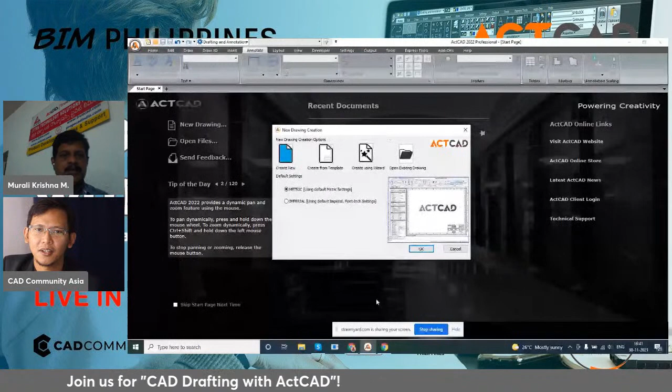So right now I've shared my entire screen, so you're able to see my ActCAD session. I want to briefly explain about CAD software, computer-aided design.

I need not explain much, most of you are familiar with computer-aided design. But back in the 1960s and 70s, most companies used to do drafting manually. From 1980 onwards computers were introduced, and from 1990 onwards computers became available even at the personal level. Most companies and individual designers started using CAD for all their design applications.

Earlier, when I started my career in the automotive industry at Tata Motors, I started with drafting boards, designing drawings on big drafting machines. We used to lock them at desired angles, using engineering drafting devices like French curves, compasses, templates, protractors, dividers, and stencil pens to get the drawing. A lot of manual process was there in the early 90s.

But from the second half of the 90s, since 1995 onwards, a lot of CAD software came into the picture. Our company, our original group OMC Computers, started developing a CAD software in the early 90s called CAD Draft, which was a DXF-based CAD software. We started selling it to many companies in India, especially government establishments, and it was giving some competition to AutoCAD in India at that time.

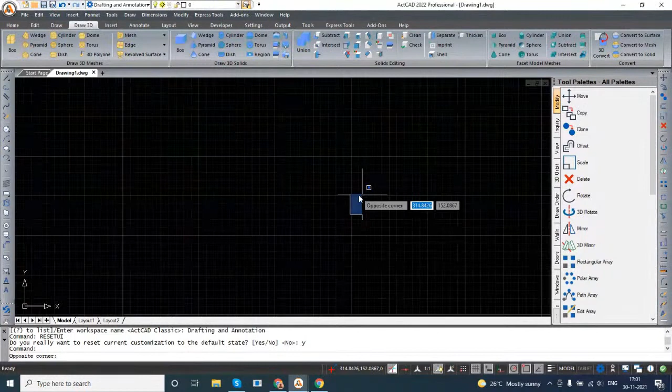Now I wanted to briefly mention these menus. They are logically designed because ActCAD has more than 1500 commands and nearly 3000 system variables in it. So how do you remember all these commands and system variables? There has to be some logical design and logical flow of the application, just like any other software.

All options related to file are available in the file menu - file open, create new, sheet set manager, closing file, saving as, importing from other file formats, exporting from ActCAD to other file formats, printing and plotting related stuff, auditing and e-transmitting, publishing the drawings. All information related to handling files will be available under this file menu.

Next one is editing. Editing is about basic editing operations at the file level, meaning the database, the DWG database level - like cut, copy, paste. It's not related to one particular entity, but as a set or group of entities, you can perform these operations - like pasting from external entities, copying from here and pasting into Office applications, or from Excel, copy and paste special here and then pasting it. All these operations, like any standard Windows application edit menu, you will find those options. Next one is view.

View is related to how your drawing is viewed in this CAD software. So, for example, if you want to regen, redraw all, zoom in, zoom out, zoom extents, dynamic zoom, panning operations, viewports, 3D orbits, like if you want to create and rotate this workspace in 3D environment. So how I'm going to view my graphics window or my entities are these things.

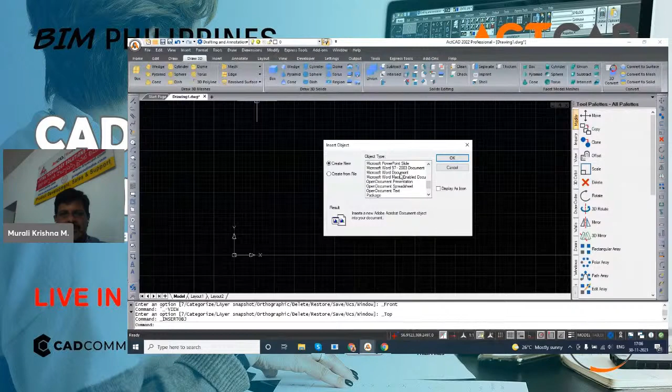inserting maps, geolocation features, setting locations, inserting layouts. This is OLE object. So if you want to insert external objects like Adobe drawings, Excel files, PowerPoint files, open documents, Word pads, all those things, PDF files, if you want to insert into this document, the current document, you can use OLE features. So all those things are available because you are inserting external objects into the drawing. That is the reason we have carefully provided them under the insert menu.

Now, format. Even without looking at the menu, you will be able to understand what is formatting. Formatting means, for example, if you are doing a manual drawing in your engineering college with the drawing sheet and paper, how do you do? First, you take the drawing sheet, fit it onto the board, and first create the borders, then insert the template, creating the title block, and allocating the names, margins, and all that stuff. Basically you are creating your workspace ready, or creating a format so that your design will be easy, and mostly you can do that.

So here, because it is a digital document, you have something called layer manager, layer tools, managing colors, line types, line weights, because these are all related to the format. I can create a line, but whether I need it as a solid line or hidden line, dashed line, center line, I will be able to put this one. Similarly, text styles manager. Most of the styles, why we use styles, that is very important. It is a very detailed subject, but very briefly I will mention because we have time limitation here.

In the drawing, if I'm having 1000 text entities or 2000 dimension entities, how do I want to control the style of all these entities as a kind of global variable or global setting? So I can create any number of text styles in this drawing, and I can quickly modify, and in one go I can select all text entities and apply this format. So I need not go back and select each of 1,000 entities and change their color or font or text height. I need not do everything for each and every entity.

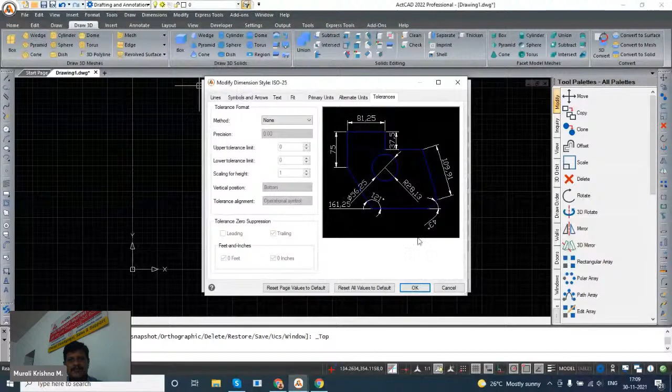And again, the advantage is in the dimension styles, you can set lot of preferences - how you want arrowheads, what types, what kind of text you want, what font you want, or what kind of text style again you want to apply. A particular text style you want to apply to the drawing style, you can do. Similarly, colors, extension lines, primary units, alternate units, everything. It is a very comprehensive dialog box. You can set all the properties of a dimension entity in one go, and you can save it here.

And once you make save here, all the dimensions, as I mentioned before, all 2,000 dimensions in your drawing, all the changes will reflect in those dimensions. Similarly, if you want to change from one dimension style to other dimension style, again it is very simple. You come back and then create one more dimension style, and you change some settings or more settings, or maybe all settings you change, and you can apply.

So that way, all these styles, as I mentioned before, they act like global settings to your drawing, and they reside inside your drawing database. They are part of the drawing database. If you are creating 10 dimension styles, they are part of your drawing file - in this case, drawing1.dwg, whatever is saved here.

So whether you are using this drawing here or you are sending it to someone else - your customer, your friend, your vendor, or your supplier - then all these styles also will be transmitted along with the drawing file. So they are not staying outside the database. All these styles, they are part of the database.

So that's the reason anyone can open this style again in either ActCAD or maybe any other software, let's say AutoCAD. They can edit the styles there, or again they can modify, and if they make any changes, again we identify them here because the database is same. Basically, we are also reading from the same DWG database. They are also reading from the same DWG database.

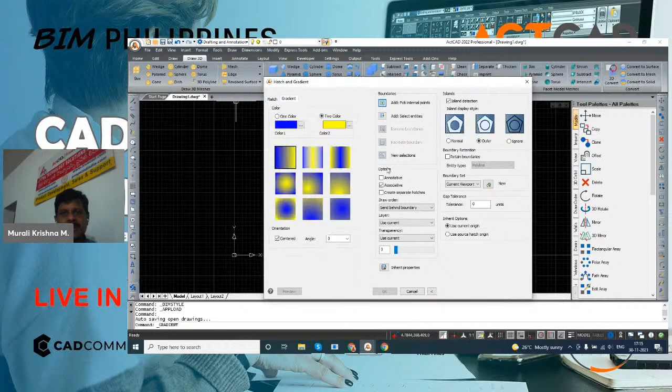You can explode dimensions, and even if you transmit them to other tools like PDF, these will be automatically exploded because there is no such entity called hatch in mathematics. But in engineering drawing, there is a meaning to this hatch, color gradient or color transitions. So we have created the entities and we do these color fills as required for the drawing representation and showing the presentation drawings. That is what is available under this draw menu, including 2D modeling and 3D.

And now if I'm changing it to the 3D modeling workspace, like that you can create a lot of workspaces. So here now I'm having the solids editing options, meshes, 3D converting options, and the file import and export options. Like that we have many more options.

But now again I'm coming back to the drafting and annotation workspace, which you can change from here, or you can also change from here by right clicking. You can go to this 3D modeling or classic workspace.

Now dimensions, as dimensions are very vital in engineering drawing, we have created a separate menu with various types of dimensions like linear, aligned, angular, ordinate dimensions, radius, center marks, tolerances, geometric dimensioning and tolerancing, and also managing these dimensions.

Like one more link, though basically it is the same link as I have shown under the format menu, but again this is available under the styles manager, saving styles, restoring. So everything related to your dimensions or any kind of dimensions, baseline dimensions, continuous dimensions, ordinate dimensions, or tolerated dimensions, size tolerances, geometric tolerances, everything is available under this menu.

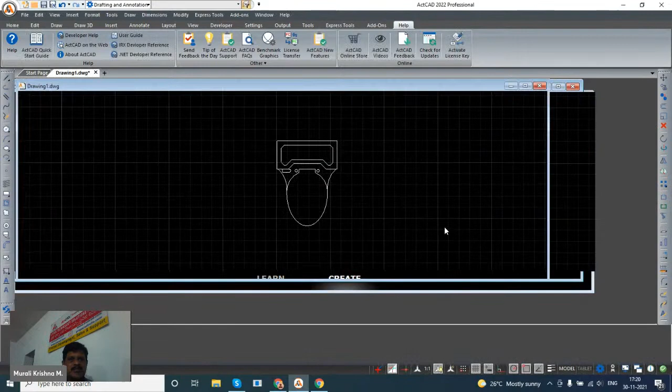So now if I want to make my start page active, I can do this. And again in the window, I am disabling the cascading options. So now you can switch these options using these window tools.

Finally, the help menu. As you all understand, any software will have complete help, developer help, user guide, tip of the days, our websites, and checking for any new version available on our server. If you want to send any feedback to us, benchmarking graphics, and about ActCAD, which version you are using at present. So 10.1 is the latest release of IntelliCAD, and 750 is the most latest version available.

Every month, we will be doing a lot of releases and patches, and you need not reinstall or uninstall the software. You simply go to the help menu and click on check for updates, and it will find if there is a new version available on our server, and automatically download and apply the patch to the installed version without the need of licensing.

So the menus and ribbon tabs are also carefully designed, like draw, 3D, inserting, annotate. The names are slightly different, like layout tab is available here, view is available, developer for developers and programmers who want to record scripts, writing programs like LISP, C++, VB.NET.

If you want to write more programs, you can use all the options here, you can find them. And settings, as I mentioned, like options - for example, if you want to control drawing options, drawing limits, drawing settings, workspace settings. If I click this, what is my default save format? If I always want to save my drawing in 2007, or save my drawing every 2 minutes, 3 minutes, what are the default file paths for support paths, templates, hatches, line types, blocks, hatch patterns.

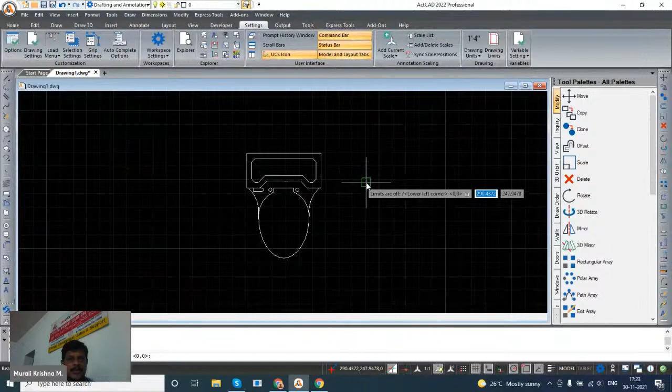Whatever things you do at the edit level are applicable to the particular document. But whatever modifications you do here are applicable to a particular entity. So you need to understand these differences, like drawing settings - if you want to set the drawing limits or settings, here also you can specify. There are keyboard shortcuts also available.

DS is the shortcut. Right now, you are able to see the drawing settings, like drawing units, angular settings, linear settings, UCS settings, coordinate inputs how you want, snap and grid, whether you want to enable them, and entity snaps, what entity snaps we have identified. Now, entity selections, whether I want to increase or reduce this pick box size, or increase the selection aperture, or entity snap representations, and the drawing limits, tracking. So all the settings related to your drawing, you can make them here. These settings are applicable to a particular drawing or the active document which you are using.

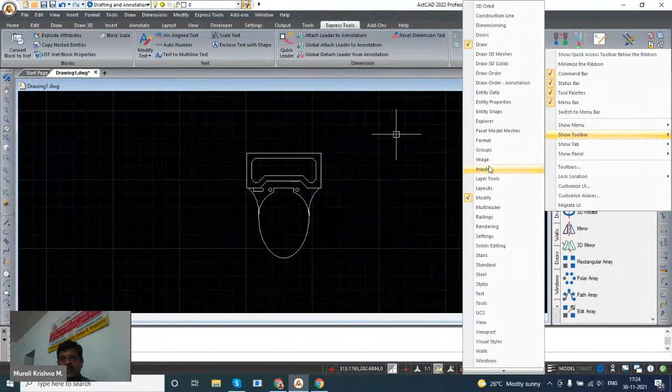This is the brief overview, and this is called the graphics menu, and these are called toolbars. Toolbars you can always move either horizontally or you can keep them here. And if you want to show more, you can always right click here, and select which menus you want to show, which menus you want to disable. And toolbars, there are so many toolbars available. Which one you want to use? If you are always working with images, you can enable that image toolbar and keep them here, and if you don't need it, you can close it.

So there are so many toolbars available, and this is called tool palettes. The most widely used things and most important commands are all available here. Similarly, if you click inquiry, tools are available here. If you click view, like front view, top view, side view, instead of going to the menus, you can click directly here so that you can access those commands. And the 3D options, draw orders, changing, inserting walls, doors, windows. You can also insert more and more tool palettes to your stuff. You can create your own tool palettes. If you are having your popular settings, you can also add them to this one.

These are some of the standard symbols. You can directly double click and insert into the drawing. And you can customize these tool palettes also based on the expert level or the advanced options you need. You can customize this tool palette, you can add, you can remove, you can move, and again, this is toolbar.

And as you see, this is the command prompt. Whatever may be the inputs you want to give or inquiries you want to give, this is the command prompt. And if you want to see a bigger version, simply press F2, and all those things are available here, all the keyboard shortcuts, function keys.

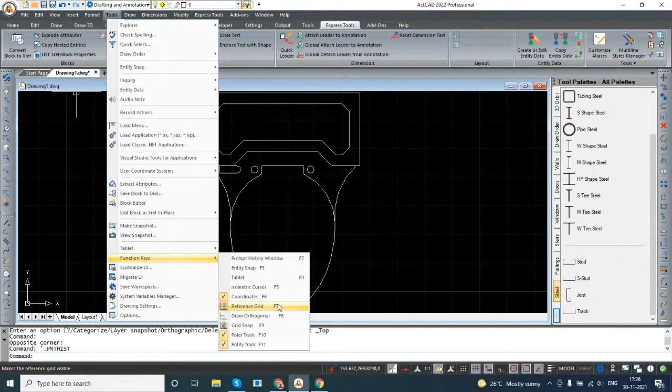Now you see here, this is F2. F3 for enabling or disabling entity snaps. Tablet options, F4. And isometric cursor, if you want to draw it in isometric mode, simply enable F5, and then your cursor will behave like an isometric constructor. And if you want to display the coordinates, like the coordinates are being displayed here. And if you want to enable the grid, the graphics grid, whatever you are seeing on the back end, F7 is the shortcut. And orthogonal entity snaps.

If you want, we will provide the settings under the customize menu, like under tools, you are having these options. Similarly, customize user interface, customize UI. Here, again, we have all these workspaces, whatever we have defined. You can define your own workspaces either through this interactive customization dialog, or you can go back to the CUI file, which is available in the install directory, and you can make a lot of changes: creating new toolbars, removing some toolbars, inserting some new ribbon tabs, all those things.

Similarly, aliases, and these are the keyboard shortcuts, whatever I have explained, like F1, F10, F2. And if you want to make any change, you can always click and change it here. Or for F5, if you want to use something else, you can change it. But mostly here, we keep them very much similar to other CAD software, because most of the people, for example, F8 means ortho mode.

Ortho mode - users are already habituated to other software, so we don't want to give a different shortcut for that. That's the reason we're maintaining the same effect here. So like this, you can import settings from other software, and you can export the CUI files interactively.

The keyboard shortcuts are all available here too. For example, beside everything you have Control+Plus, Control+1, Control+S. You can customize everything in your CUI file, either interactively or based on your expertise level, by going directly to the CUI file and making necessary changes.

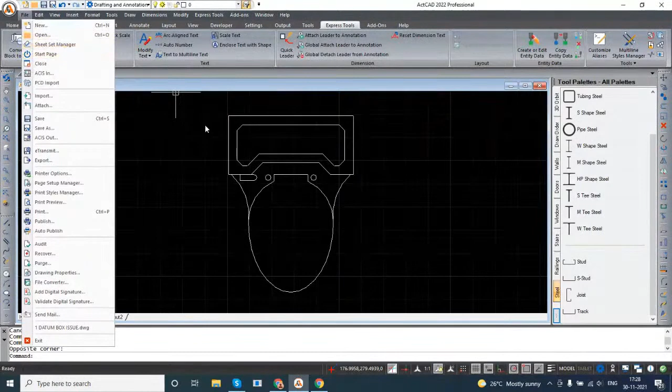Now, this is the bottom panel. It always shows the indicator and message. For example, going back to the home menu, if I click line, now I'm creating a line, and you can dynamically see the coordinates. We also support dynamic screen input, like how we are creating here, and all the options are available. Now it shows the current status.

For example, if I want to insert a block - this block I already have in the database - I'm able to repeat it once I get into the same drawing. So now you can see the cursor movement and coordinates here.

This is cursor mode, whether you want to enable or disable it, and the crosshair mode, how you want to show them, and annotative scales. Once you want to plot your drawing or entities at a different scale with respect to your paper or plotter size, you can use the annotative scales, and all the supported annotative scales are available here.

Similarly, how they want to be visible, all the settings are here. And here's snapping mode - how you want to snap to these entities, enable or disable running snaps. If you enable running snaps, whenever you keep clicking on things, it will automatically try to snap to the control points.

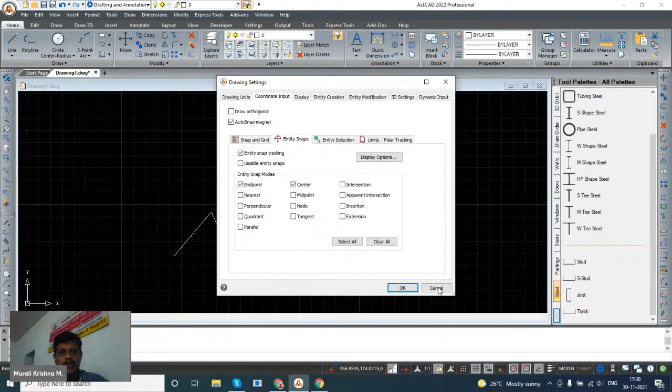If you click on settings, you'll get the snap and grid settings here. And entity snaps, as mentioned before, like endpoint, start point - whatever is to be default enabled - you can select them all, clear them all, or show only the major ones. You can apply or cancel these settings.

Another thing is the dynamic screen mode input. If you want to switch it in or out - what is dynamic screen mode? For example, if I'm typing, now 112 is there, I can directly type the value here, and that line has already taken this value. Now if I want to type 80, the line length automatically becomes 80. So I can dynamically input values on the screen graphics window itself, instead of going to the command prompt - that is dynamic input.

Whether you want to enable or disable it, you can do that here. And ortho mode, again F8 - what is F8? If you want to enable it while drawing a line, you can also use the Shift button. If you want to send it either perfectly horizontal or perfectly vertical, ortho mode has to be on. For example, if I switch this off, it can go in any direction.

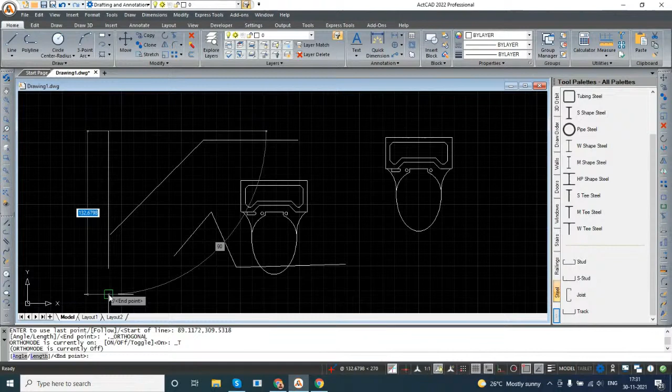Okay, now you can see it's going at any angle - it's not assuming the nearest snap or magnet that it should go perfectly horizontal or perfectly vertical. So if you enable this ortho mode, like we do in orthographic projections, that will help take perpendicular lines from the current cursor location.

The next one is polar tracking. If you want to enable polar tracking, with respect to the point, if I'm taking the line, at what angle I want to give, you can snap that value - the angle, whatever you're giving, whether you want it at an increment of 5 degrees, 10 degrees, or 6 degrees, you can do that.

And as mentioned earlier, these are all the entity snaps. You can go to drawing settings, or go to the tools menu, or directly do it from right-click. We've given the popular shortcuts here - either you can enable or disable them. Similarly, if you come and...

In the draw menu, all these settings are also provided. This is the example of running snaps. If you are having problems picking some entities, you can enable these running snaps, and the software will behave a bit more intelligent and try to capture snap points from other locations. The same settings are available from multiple locations, including this bottom menu which we can access from here.

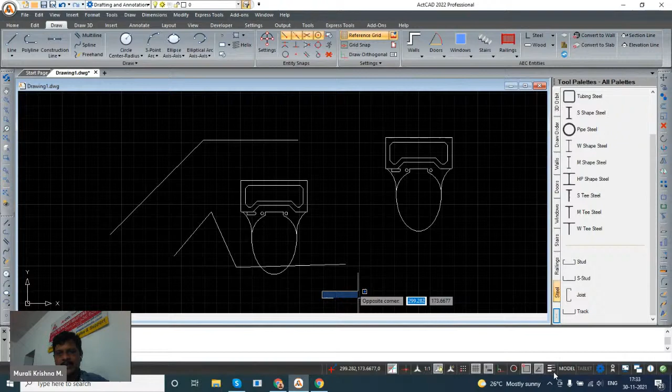This is about line weight display, switch off entity track, and line weights, whether you want to display line weight or enable or disable it. So if the line weight is 2mm, then if you enable this, it is displayed as 2mm. Depending upon your requirement, you can either enable or disable it.

As I mentioned, this is switching between the workspaces, and this is about our graphic device. In ActCAD, we support 3 modes: basic mode, OpenGL mode, and OpenGL ES mode. Right now the advanced OpenGL ES is disabled because there are still some compatibility and stability issues with the OpenGL ES graphics drivers, but the default setting is OpenGL. To operate ActCAD software, you don't need dedicated graphics hardware - whatever drivers you have, whether onboard or dedicated, every computer will have an OpenGL version, and we need at least version 2.0. If you have a higher version, it's better - you can get better graphics performance from the software.

You can set this value, GS used device mode, and that is a system variable. Before moving to the next topic, I wanted to show you the most important thing here. As I mentioned, there are a lot of system variables. What is a system variable? Most users may not be aware. There are many variables available inside the drawing database, for example FILEDIA, which controls how something should be displayed. Now we have all these system variables available, along with their limits.

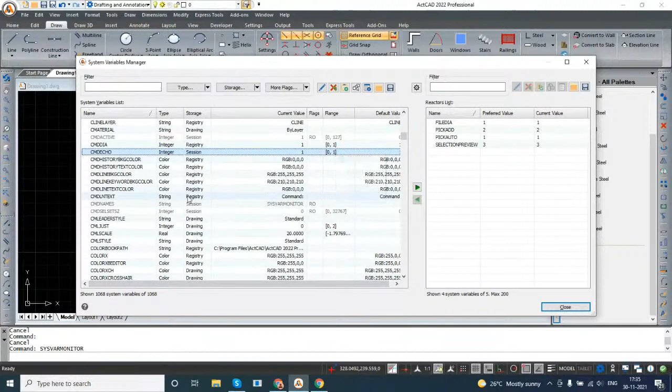For example, CMDECHO - if you check it, it shows a range of 0 and 1, whether it should display or not display in the drawing prompt. Similarly, if I want to change the pick box, which I showed you earlier from the dialog, now you can see the pick box entity is available here, and what is the current value? I set it to 7. But what is the permitted range? 0 to 50. And what is the default value? 6. So if I want, I can even modify them here - this is the value I can change. But if I try to give 99, I will get a warning, so it cannot go beyond the permitted values.

What are these variables? They are nothing but the settings or preferences or values available inside the drawing. For example, pick first behavior - either you want to set it to 0 or 1. A lot of advanced CAD users are familiar with these system variables.

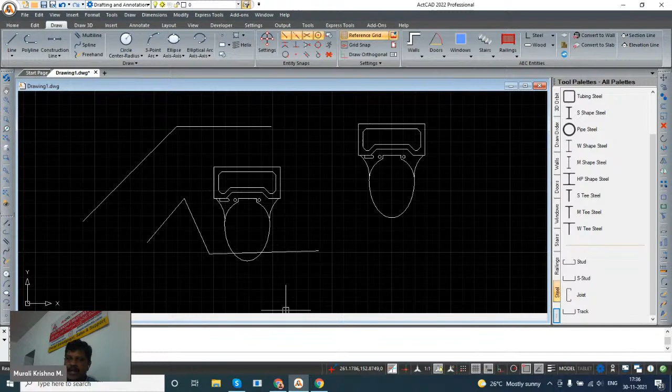What I wanted to show is we do have a sysvar monitor if you want to quickly find some settings inside ActCAD - for example, if somebody wants to increase the text quality. So once again, in the sysvar monitor, I'll type 'text'. Now all the system variables related to this are coming up - what is Q text mode, print text out, M text ED. These variables are very similar to AutoCAD.

Now here, TXT - text quality. At what quality do I want to set the value? 0 and 100, so the least value is 0 and maximum value is 100. Similarly, text size - this is how you define these values and settings. All system variables are part of your drawing, saved inside your drawing file. If you change this value and save the drawing, this value becomes part of the drawing.

If you open it in some other ActCAD version or competitor software, the same value will be reflected there. Similarly, text style - what is the default style? Either you always want to keep standard or something else, since right now this default drawing only has one text style. You can have many operations related to everything like this - either select all, select clear all, related to text, points, and everything. These tools are not even available in some expensive CAD software.

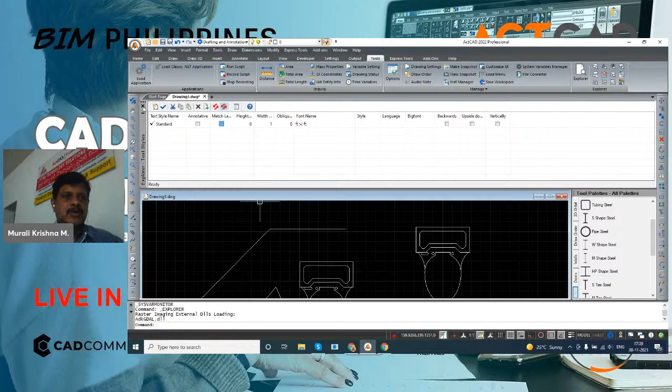Let me map them here. Like this, it will open up all the things under the palette, and here you can find how you are going to display them. So like this, now text styles opened here. Now you go back. You can also separate them like this.

I have taken that out. Now again, you can dock, auto hide, make transparent, or close it. Come back to the Explorer, it is available. What are the external references available in this drawing? Right now it shows 0 items are used. What are the current blocks? Double click, this is the WC plans. How you are going to orient this, you have to set whether you want this Explorer horizontal or vertical.

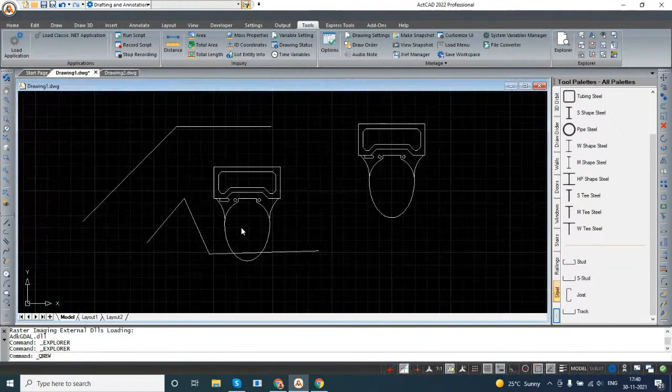But copying a block from one drawing to another drawing is also possible. For example, I have created one more drawing here. Now coming from the Explorer, double clicking the block, selecting it, copying, and coming here under this block, I can paste it. Now this block from this drawing I have easily copied and pasted into this one. Now it is part of this drawing's database. Let me go back and insert. Now you see, it is part of your second database also.

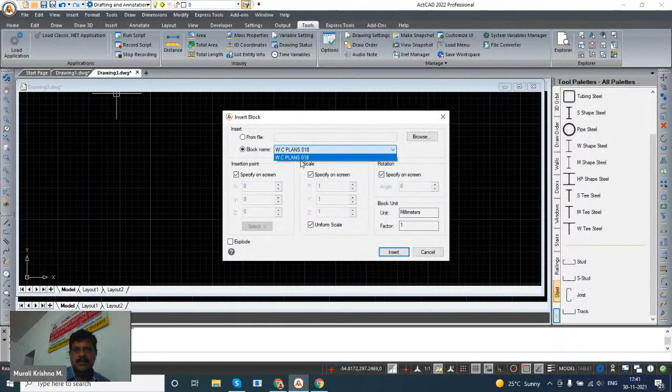Whatever is here in the other drawing also, I am going to the Explorer once again, paste it, close here, and again in this drawing if you go to insert block, that is already available because I already pasted it into the database. So even if you have 20, 30, 40, any number of blocks from one drawing to another, you can easily copy and paste. You are pasting them as blocks, but it's not only related to blocks. Dimension styles, layouts, materials, groups - you can copy and paste any of these. So this ActCAD Explorer is also another powerful tool.

Now let's also talk quickly about model space and layout space. I am closing this drawing. Model space means this is the 3D modeling space, and layout is basically a kind of paper space, so you cannot rotate these views - it's only a 2D representation. Whatever you see here are called viewports, like the view boundaries which you can adjust, and this is the position of the view.

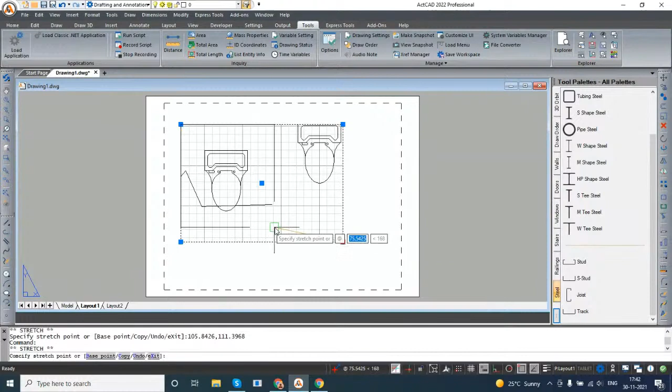It has nothing to do with the entity you are drawing. Even if you delete it here, you are only deleting the representation. But if you go back to the model space, that entity is still there. So what is the advantage of model space and layout space? Now I am having this entity here, and here I can insert viewports.

You can also go to the layout, and here we have viewports. If I want to insert 4 viewports, you select from here to here - one layout or multiple viewports, all possible here. If I want to insert 2 viewports, it asks horizontal or vertical, vertical, then first point and second point of the screen. Now it has inserted 2 - see here, this is one boundary, this is the other boundary. You can use them for 3D models - for example, if you have a 3D model, you can insert front view, side view, top view directly from the 3D model based on availability.

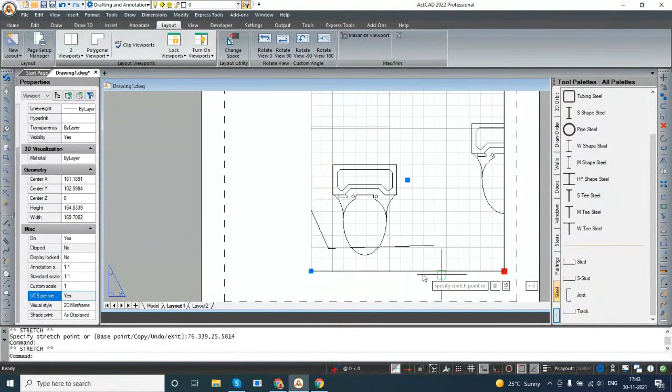Now in this case, I right click and set the properties. This is available at a particular scale - this is the custom scale, let me put it as 1. So now in this drawing I'm showing this western commode at 1:1 scale. But in the other drawing, I wanted to show it at double scale or half scale. Again, you go here and change the scale, maybe 2 here. So this is double the scale, and you can adjust the boundary and position as needed.

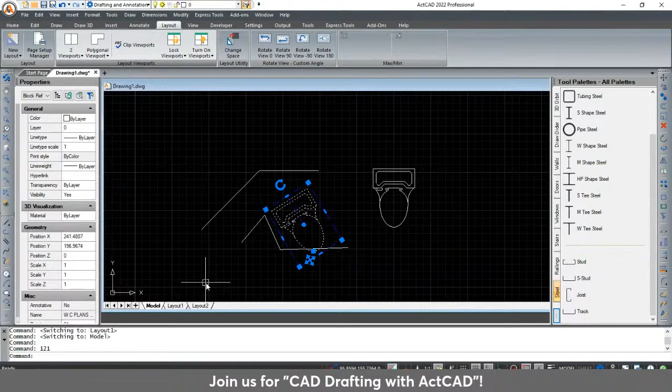Now the same entity, in this view I am showing as 2:1 scale; in this layout I am showing it 1:1 scale, or like a detail view. Whatever modification I make to this one, the changes will reflect in both views. For example, if I rotate this here in model space, it has associativity to this one, so now this is rotated here too.

So that's mostly for plotting purposes and creating 2D views, orthographic views, and giving dimensions irrespective of the original geometry scale. For example, if you are designing a very big vehicle, the actual size is too big, but you cannot plot that original size to the drawing. That's why you can insert a view at an increased or reduced scale. So that is the concept of viewports, layouts, and model space.

Now I have one more topic I wanted to convey, the concept of layers. For example, if you go to the home tab, here Explore Layers. So what is the concept of layers? In order to manage all these entities in your drawing, you can define an infinite number of layers.

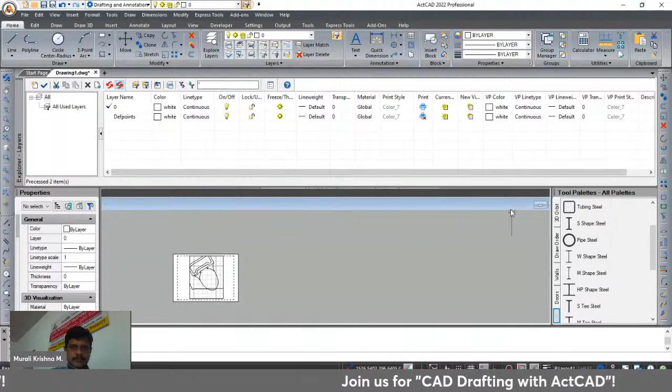For example, coming to this particular drawing once again, now I'm able to see the model space. This I wanted to move to a different layer, say layer number 2. I don't want to see this one, so I can set this layer, move it to the layer, or in the properties palette, directly set it to layer number 2. Okay, now those entities are on layer number 2.

For layer number 2, I can also apply different kinds of styles. Let's say I change the color, change the line width, apply locking, or change the line type to dashed lines for all entities on that particular layer. And if I don't want to show them, I can simply switch that layer on or off.

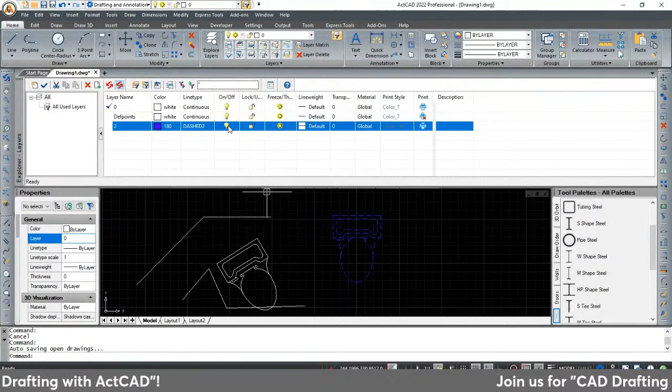It's like plastic sheets. You can create the plastic sheets one behind the other, one above the other, and create different entities on different plastic sheets. If you remember the old overhead projector, if you keep one sheet, only the contents drawn on that plastic sheet are projected to the screen. If you overlap one more plastic sheet with different entities, then both can be seen projected after projection. So like that, you can insert multiple layers.

So those are the physical plastic layers which are transparent, but here these are the digital layers available inside the CAD software, and you can create an infinite number of layers.

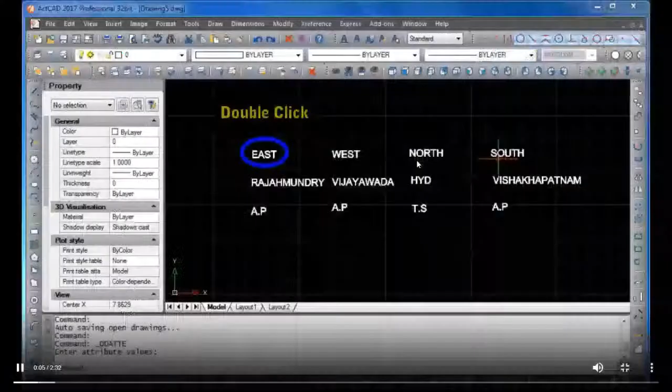For example, if you type a command called tutorials, because I cannot demonstrate everything in this session, it will launch our videos. File menu, view menu, edit menu, draw menu, all the commands are available. If you want to play those videos, you simply play them here, and most of the time we have audio showing how the operation is performed, live demonstrated. Though it's a 2017 version of ActCAD, most of these operations are still valid. Similarly, for 3D modeling options, 3D tools menu options, how to create these things, how to create and manage layers, we have detailed videos available for your practice.

So there are so many advantages of layers. Like for plotting, you can set a particular style, and if you want to exclude this layer from plotting, you can cross it out. So whenever you are plotting, for example, going back from print preview, you want this only for your representation. Now going to the print and plot dialog, I'm selecting ActCAD PDF printer, and in the window I've selected these entities. In the preview, if you see, that is not available because I have locked it on the layers - I have not permitted it for plotting or printing.

So like that, again, you can go back and unlock it, you can change the line colors, and at a global level, for all the entities in that particular layer, these changes are applicable. So there are so many advantages of layers, which we have explained in our quick start guide and also in the detailed help menu.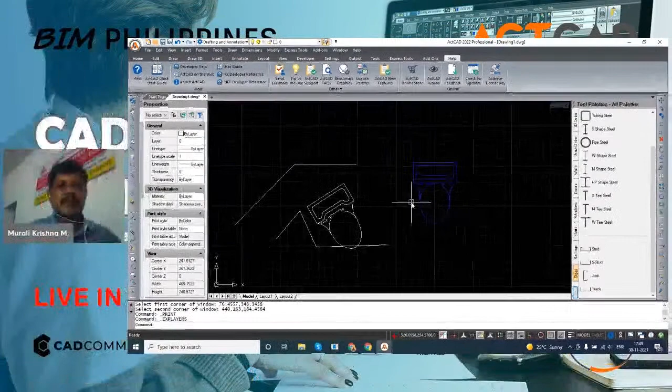So that is the concept of layers, and you can create any number of layers without any limitations. You can name them any name you want, like doors, windows, and our 3D entities like AEC objects for the BIM elements. If you are inserting a wall, automatically wall layer will be created. If you are inserting a table, the table will go to the default layer.

And always there has to be some work layer, which is having this check mark. That is the default layer. Whatever entity you are creating or drawing, that will go and stay in this layer by default. If you want, you can always change it by right clicking, and this is called the properties palette, which you can always use.

Now, some of these operations, if you want to manage these things, with the mouse wheel, if I'm rotating, zoom in and zoom out operations. Similarly, if you right click, you have so many options like real-time panning, real-time zoom, like if you want to do it in a 3D sphere, if you want to rotate them and see, these are all planar entities, 2D planar entities.

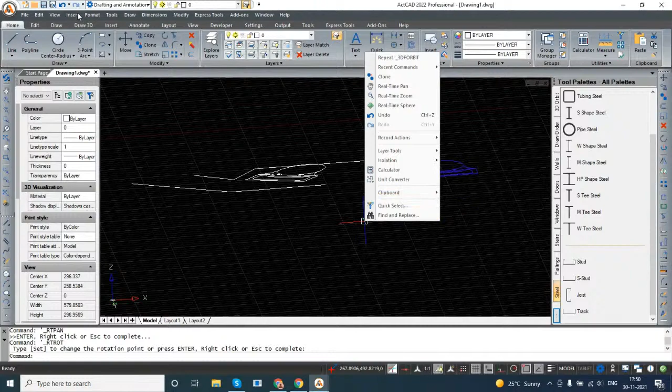But if I want to rotate them, right now I'm not doing any 3D modeling in this, but you can directly see all of them here. And if I want to cancel and go back to my other view, view menu, 3D views, and then top view.

So here also under the view, you have most of these zoom operations: dynamic zoom, previous, zoom to previous, zoom left, and most of the times we use zoom extents, Z enter and E enter. So now again, when I'm typing the zoom command, it is showing multiple options here, like zoom in or zoom out or zoom all or zoom center or dynamic.

And the extension, when I used E, then it has taken extents. Sorry, because that is starting with E. That is the kind of syntax and the level you can always follow throughout this one.

And we also support clickable keywords. For example, when I'm typing zoom, instead of clicking that, you can also do the right click. Okay, now it is asking what is the upper right corner, and do this. So whatever value from here to here, whatever is the distance, with that much scale factor, it has scaled, zoomed my entities. Basically, it is not changing the size of the entities.

The zoom and pan operations are basically enabling you to see things better, because your graphics window space is limited, because you have a very small screen and you cannot see the very big drawing here. And if you want to do some operation, you can zoom in here, and REA is a command like regen all. When you do it, now it is zoomed properly and you can perform your operations here.

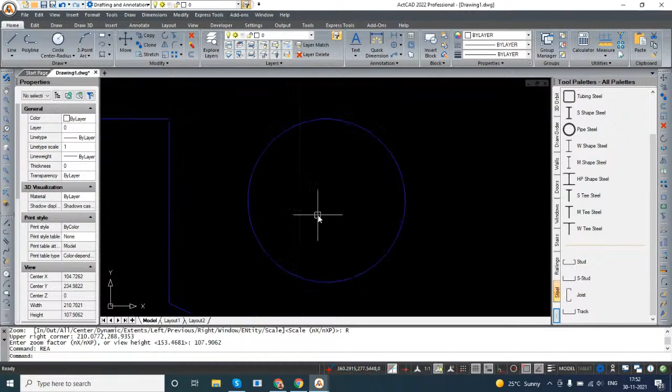Like if I want to do a hatch inside this one, you can select and then you can click the point, enter, and do it. But right now that hatch is not visible because the entity scale is very small, right? So that is the reason the hatch entity, I need to select, and then I need to increase the scale or decrease the scale.

Maybe I can show it on a separate entity, like this circle. I am applying hatch. Okay, now you see, because this circle is much bigger, for that particular scale it is visible, but because this diameter is very small, that is not visible.

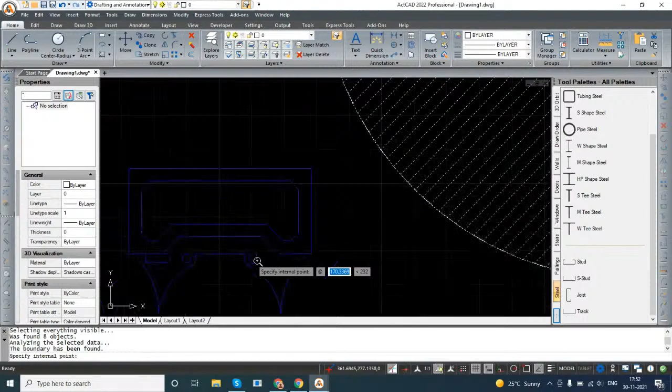So like that, you can select these entities, and you can do that. And if you want to select such entities, you can also use this quick filter, and filter options are always available, like layer 0, layer 2. Now I'm getting the hatch. From the tool palette, when I'm enabling that, I want to reduce it now, because that was no more visible to me on the screen for selection. But when I selected like this, I'm able to see that.

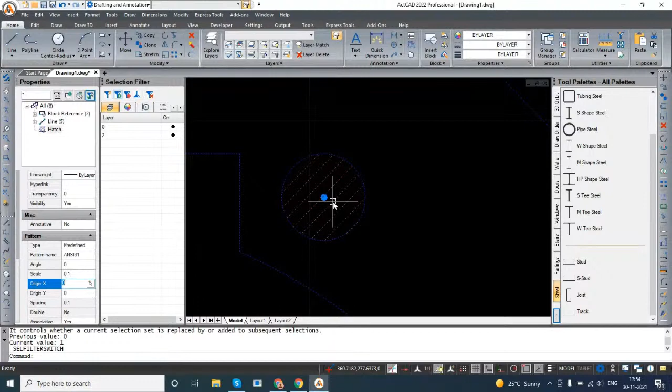Okay, now I'm going to the filter option. Layer 0, this entity is available, and this maybe I will still reduce. Okay, this scale I have to change to 0.1. You see, you are able to see that. So though I am unable to see the entity, the entity still got created earlier. So now if you want to delete it, you can select it and delete it from your drawing.

So these are all the advantages of creating the zoom in, pan operations, dynamic pan, dynamic rotation, like that. And as I mentioned before, the entity snaps, if I want to select the endpoint of this, now let us do one small activity here.

Okay, this is the polar tracking. Now entity snaps, I have cleared everything. Now if I want to draw one line exactly to this one, now you see it is not allowing me to do that. So that is called entity snaps.

Now I'm going back to this one. In the settings, now I am enabling, let's say, endpoint. Okay, now you see I'm able to pick the endpoints, but not the midpoint here. Okay, so here also I'm unable to meet. Either I can click this endpoint or this endpoint or this endpoint or this endpoint. So based on your requirement, you can go to these snap settings, and you can enable nearest, perpendicular, parallel, or quadrant. Now you see, it is able to identify the midpoint also.

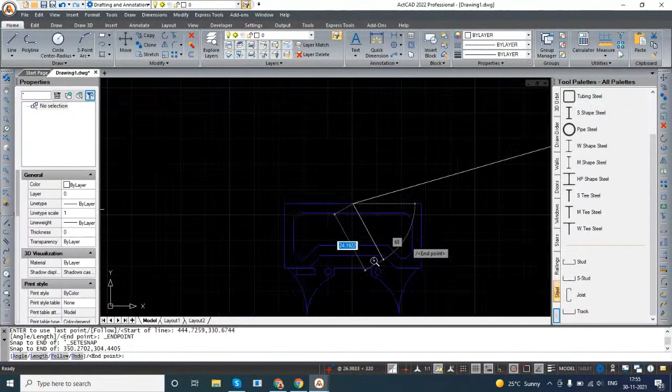So like that, you can create the snaps. The entity snaps are very useful. And object tracking, the entity tracking, e-tracking, that option is also very useful.

And as I mentioned, orthographic is for perpendicular control. Now, if I want to draw something, this is snap to grid. So now I will be able to snap to the grid points also. You see here on the grid, if you want to draw something, and that grid size you can always adjust. Now you see I'm able to enable the snaps, like the magnetic pick points onto the snap. So that is the option here.

Orthogonal on and off, and entity snaps. Okay, again I'm selecting, click OK, like this. Now you see, the ortho mode also I have enabled. Now when I'm drawing here, those magnetic lines are showing me, this is called the entity tracking or object tracking. So now I know that I am drawing a perfect horizontal line. Now I am drawing a perfect perpendicular vertical line.

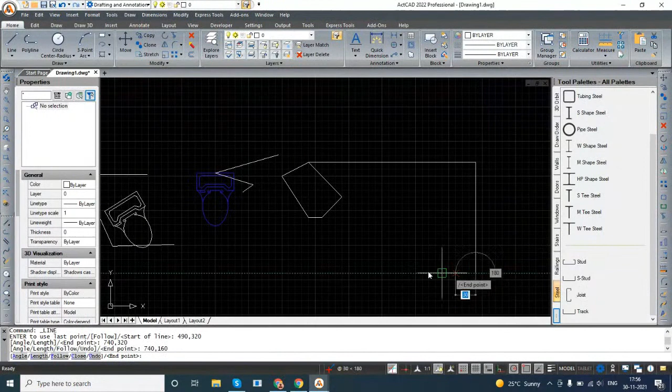Now you can also snap to this endpoint. Now along that line I am creating, this endpoint is lying on that straight line. So like that, these are called e-tracking, entity tracking, or object tracking. E-track means entity track, O-track means object track. Some softwares call it O-track, we call it E-track, or vice versa, something like that.

But basically, if you want to track the entities, now I want to create a line which is inline to this one. So that is how I have enabled that snap. Now let me disable this because both are getting conflicted. Now when I disabled it, you see I'm able to get the perfect snap of that one.

Okay, now again, if I want to draw, you are able to see those green lines. These are the rubber bands. So even I am able to find the virtual intersection. So now that line is a perpendicular exact intersection of this line. Now I can complete that line. So that is called object tracking.

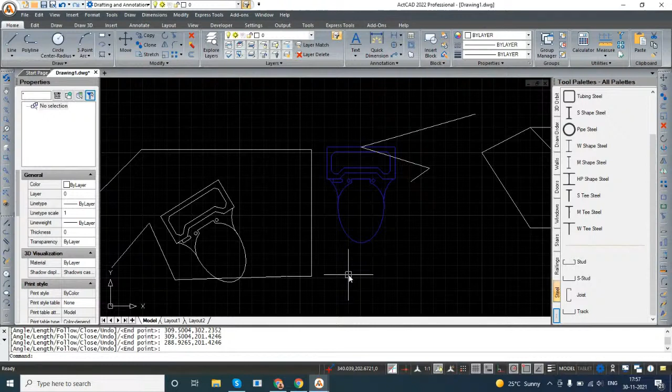So we will move to the next topic. I have shown most of these basic settings, the interface, the controls, the snap settings, e-tracking, O-tracking, and the snap settings, layer settings, what are layers, we have seen everything.

Now quickly we will see the line. This is the standard line segment. You can create lines here, and to create lines also multiple options are there. You can go by relative coordinate system or absolute coordinate system.

And the circle, as you can see, there are so many ways of constructing circles. Tan circle, using 3 points, using 2 points. They are very self-explanatory, how you want to create a circle.

Similarly, arc, so many options are available. Whether you want to create a tangent arc, a 3-point arc, arc with start point, angle and center, or arc, center, start, angle. Why these many options? Basically, mathematically, there are so many possibilities to construct an arc based on the user requirement and user input. You can do that.

So arc, line, and circle. But why did I skip polyline? Polyline is a combination between these two things. Now you see, again, it is showing the options. Now if you want to draw an arc, I simply clicked on arc. I have, now the arc is being continued, right? And again, if you want, whether you want angle or center or direction, or you want to convert again to the straight line, you can do that.

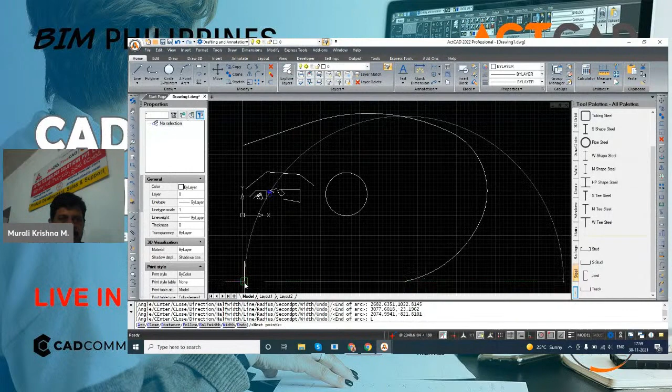Again, entity track is created. Now what is the difference between this and this? These are three separate lines, three separate entities, and on the history also it is showing three. But when I'm selecting this, it is one entity. Though it is a combination of line, arc, and another line, it behaves like a single entity. That is called polyline.

And you can always explode it. Now when I exploded it, you see it became separate entities. In the history navigator also, you can see I'm having 2 lines and 1 arc.

Polyline - so even if you take rectangle, rectangle is nothing but a polyline, and polygon is also nothing but a polyline. Rectangle is nothing but a single polyline. Now when you explode it, it became 4 line segments. But for the sake of convenience and for drafting purposes, you can always use this one.

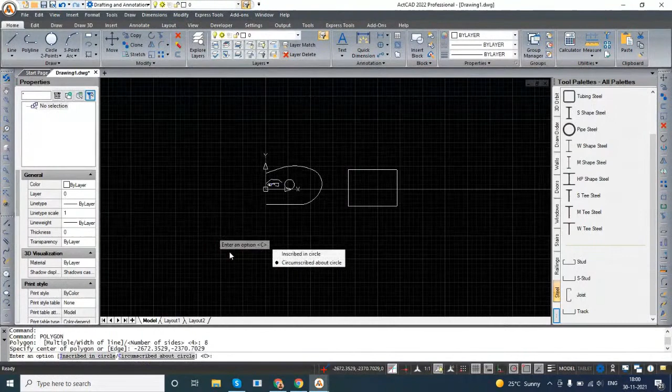Similarly, polygon is also nothing but an entity which is a polyline. Now you see whether you want multiple or single, number of sides - how many you want? I want 8 sides, that will become an octagon, and specify the center of this polygon. So inscribed circle or circumscribed circle - you can decide, and you can create and put the point.

Once again, I'm telling what is the computation, what is the rationale behind these constructions. I'm using the included angle of any polygon, which is equivalent to 360 by n, and it is a combination of all equilateral triangles - that is what polygon is. If you have 8 sides, that's 8 equilateral triangles, and the included angle of each triangle is 180 degrees, and the angle between two sides is 180 minus 360 by n. That is the standard formula.

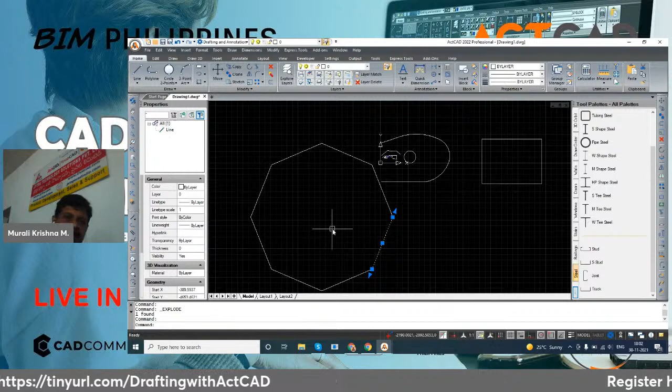Whether we write the program or somebody else writes the program, they have to abide by the same logics. Once you explode, even if you write your own program using Lisp or .NET, you have to go by the same mathematical fundamentals. We cannot change the geometry and the basic rules of mathematics. That is what I'm trying to show again and again. Whatever you are creating, how you write your code - whether it is efficient, or if somebody else can write a program much easier, faster, and simpler - that makes the difference.

And at the end of the day, how much you are paying for a CAD software - our motto is this: instead of paying huge and exorbitant costs, you pay one little fee so that every individual, every school, every student can afford a CAD software and use it for any commercial project, whether a small project, hobby project, small business, internal design applications, home modifications, or if you want to design some cot or bed for yourself. You can use software like this and take advantage of all standard blocks, symbols, and 3D models and items from the internet. A lot of content is available even on the internet.

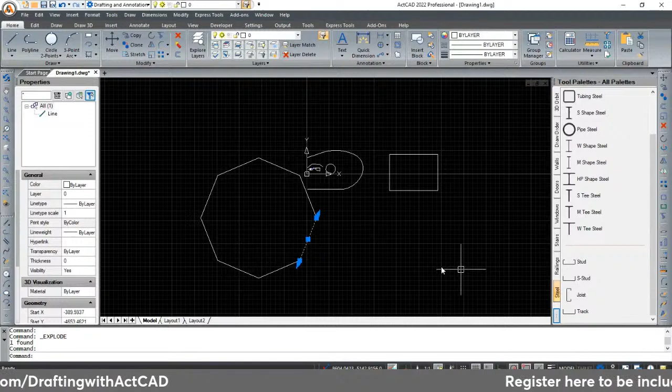So like that, we have discussed about various 2D entities. And once again, if you take any complicated drawing, it is a combination of these primitive entities, the basic geometric entities like line, arc, and circle. One more thing I wanted to cover here - these are the elliptical arcs, right? So ellipse is nothing but again the same mathematical logic, having two focal points. Circle has one center point, but ellipse has two focal points.

Okay, so now again, this is a kind of end of the ellipse I have selected. Under the ellipse there are multiple options - ellipse with axis and axis. So this is the major axis I have selected, and this is the minor axis I have selected. And again, ellipse, axis, and then rotation. For example, I have created this ellipse, and with what rotation you have this angle. Based on the type you want to give, you can do it this way.

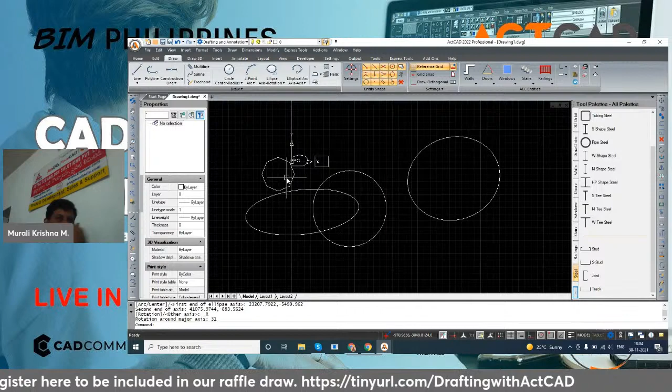So this is any of your complicated drawing. Another entity is called the Bezier spline or spline. Again, it is driven by mathematical equations. The degree of any spline, the minimum is 2 and maximum is 24, and there is no other possibility beyond these two values.

You can set the value depending upon the degree of freedom, how much deviation it is taking from the vertex point, how much mathematical or Bezier deviation it takes. This is mostly used for free-form kind of shapes and designs, like if you want to design some clothing or a dress inside ActCAD, you can adjust it as a free form and do the design.

Basically, it is controlled by the vertices. If you want to increase the number of vertices, this is called the properties palette, which is very important. All the properties of this entity you will be able to see here. Now you see the degree of this one is 3, the way I created it, so it takes a third degree deviation from the vertices point. The maximum possibility is 24, so if you need too much flexibility and deviation from that.

Now, take any drawing or any complicated entity or shape, it is a combination of these basic entities.

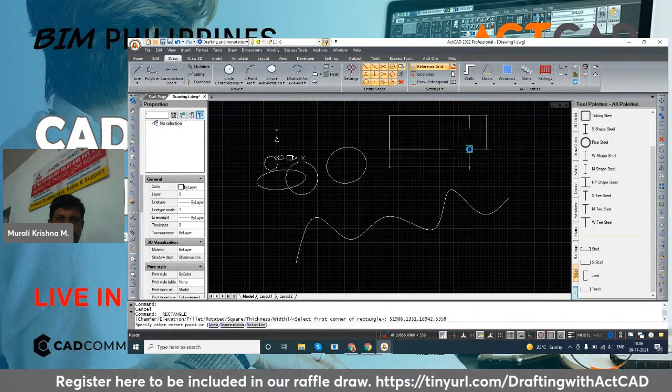Let me do one dimension also, so we will create. Okay, now this is my rectangle. Let me create a hatch. I'm focusing more on the principles and concepts of this CAD software. Now this is the hatch I'm selecting, and the scale is too low for me, so maybe I'm keeping it 40. That is also less, maybe I can keep 300. Okay, that's how I created the hatch.

You can change its color to a different thing. Most of the things you can control from the properties palette. Whenever you select a particular entity, that entity's properties are highlighted in this properties palette. If I select this, these entity properties are highlighted here, and these are called grips. It is not highlighting the boundary because that is associated to the rectangle. Now you see, when I moved the rectangle, that hatch automatically moved because it is an associative hatch.

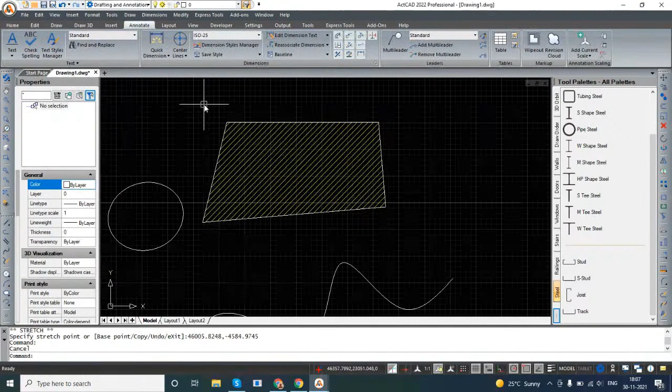Now coming back to the annotation, I'm selecting one linear dimension from here to here. So though we call it a dimension entity, right now the text height is very small, but it already has its own arrowheads and everything, right?

But now let me select this. It is a single entity. That is how the software creates it as an entity and stores it in the database. Now, when I'm exploding, you see here, this is an entity, this is another entity. These are all straight lines, and that may be a solid hatch, right? That is what you are seeing there, a solid.

Similarly, if I'm selecting a hatch, though it is a single entity, now if I explode, you see it is a combination of all lines. Why I'm telling this is, any entity, whether it is a 2D drawing or mechanical drawing or dimension or hatch or most of these things, they're all a combination of these primitive entities.

When you are coming to 3D modeling, again, that is a combination of primitive solids, like the basic block—those are called the primitive shapes: block, cylinder, sphere, and cone. Any geometry is a combination of these four primitive shapes.

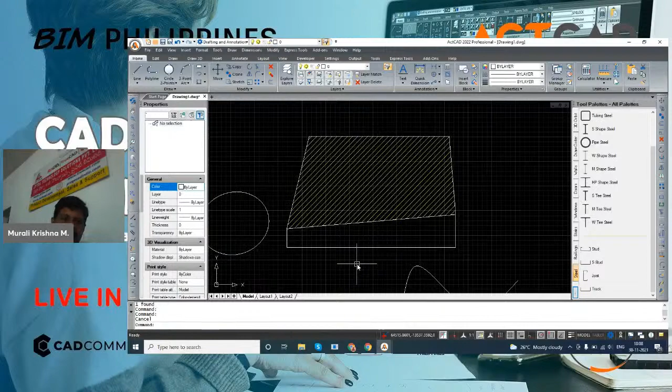And you can perform some Boolean operations like uniting them. Again, in mathematics we learn unions, subtractions, and all these things, so the same geometric principles we apply here. If you want to join two bodies, we do the union operation. If you want to cut one solid from the other, that is a kind of subtract operation. If you want to find the intersection volume between two bodies, you can use the intersection option. So whether it is 2D or 3D, they are based on these regular basic entities and primitive bodies.

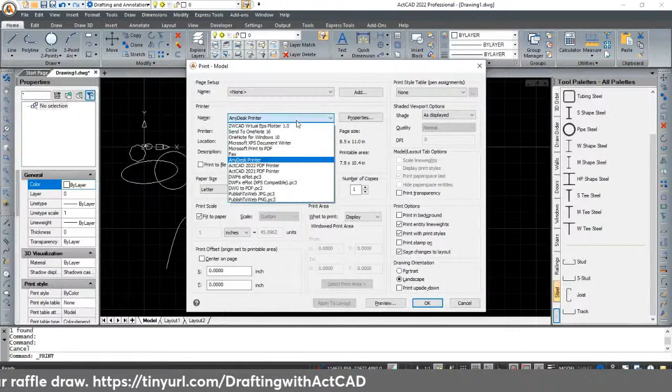So properties palettes, tool palettes, all those things I have explained, and the print and plot dialog also I have briefly shown you. But whatever you designed, you can always use ActCAD 2022 PDF printer, your local printers, or image printers. You can create anything, and all these options are similar to any other CAD software you may be familiar with.

You can see the preview, apply colors, apply styles like displayed, wireframe, or rendered mode. You can also apply CTB files or monochrome. I have applied ICAD.CTB here, and now if I go back, those settings are applied to my preview. Once this is done, you simply print. In this computer the PDF printer is not activated right now, but you can directly print to a PDF printer. Similarly, you can also do the export—the Export PDF option is also very powerful here.

In the export command, you have PDF, SVG (scalable vector graphics), BMP, Windows Metafile (EMF), and stereolithography. When you have a 3D model and want to send it for 3D printing, you can export it to STL file format. Collada, web formats, MicroStation DGN, IGS files (initial graphic exchange specifications), and STEP format are mostly used for 3D.

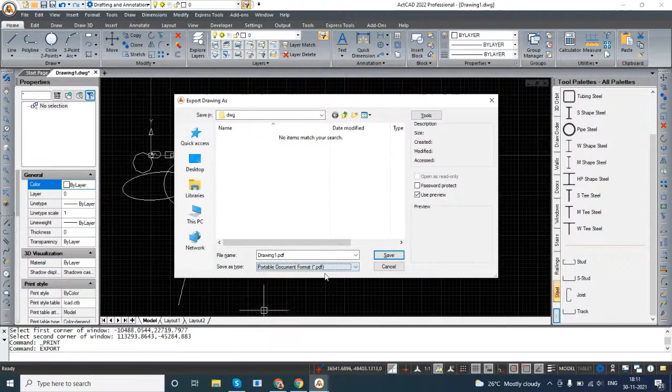So now for the time being, I'm using PDF. Now I'm getting a detail option about whether you want to embed any fonts. If you have any 3D model, you can enable this option, which will become your 3D PDF. So even 3D models, you can save them as a 3D PDF. That capability is there in ActCAD software.

You will be able to open them in any regular free PDF viewer like Adobe Viewer, and you can rotate them, view them, and scan them. Now I'm setting, even if you want to set any properties to your PDF file, you can do so. And finally, you can save that PDF file. So export completed successfully.

I just want to double check what is the default path. Okay, so it is in this DWG folder, it is there in this location. Now, instead of exploring from there, I can directly open it from here. This is the PDF in vectorized format that it has exported.

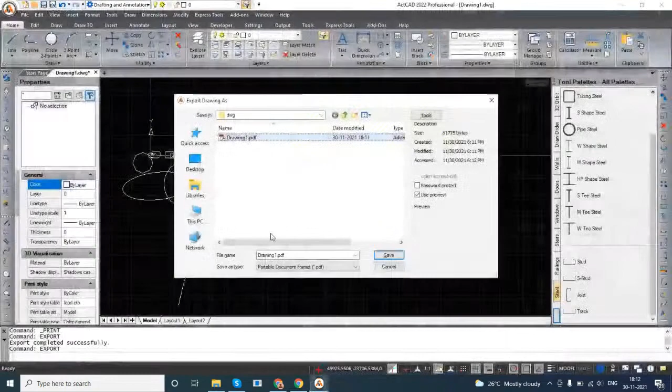This is normal Adobe viewer. In the standard plot dialog, you can apply styles like monochrome or CTB, or you can define new styles, STB files, and the definition also you can do as displayed. In our PDF, multiple settings like custom settings, custom properties, custom paper size, multiple ways, and the DPI we support up to 2400 dots per inch. Very high resolution PDF you will also be able to create through ActCAD software. So this is our standard plot dialog, very similar to other software.

Now let's discuss blocks. When I mentioned in the add-ons, I showed there are so many standard blocks we have created, more than 5,000 symbols. For example, I wanted to insert some GD&T symbols. This is the cylindricity control I have inserted here. I can use a different scale in X direction, Y direction, and Z direction, and the rotation angle also I can keep it at 45 degrees.

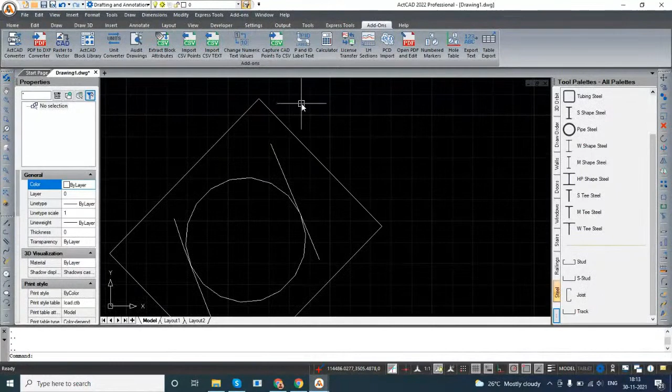Now what do you mean by these blocks? Blocks are standard symbols. You can copy paste and use them any number of times in the drawing. So I simply copied and did Control C, Control V. Now what is the advantage of this block? I used it at multiple places, but in my drawing it is stored only in one location, in one table.

So today, if I want to edit this block, I'm doing a command, let's say double clicking this. Now I get this option, either edit this Western commode or this GD&T symbol. I want to edit this. Now I went into edit mode. Here I reduced the circle diameter, and maybe this line also I moved. I'm not doing it precisely.

So I made some changes to this one. Also, just for the sake of understanding, I rotated this and kept it like this. Now I'm saving this, closing block editing. It's asking me whether I want to save the changes or discard. I saved it. Now when I made this change, you see the changes have reflected at all other places inside the drawing.

Basically, it is referring to the same geometry from one place at all other places. So that way, even if you are having 1,000 seats in your theater, you are not repeating or duplicating that geometry at 1,000 places. That way, your file size will be very small and very compact.

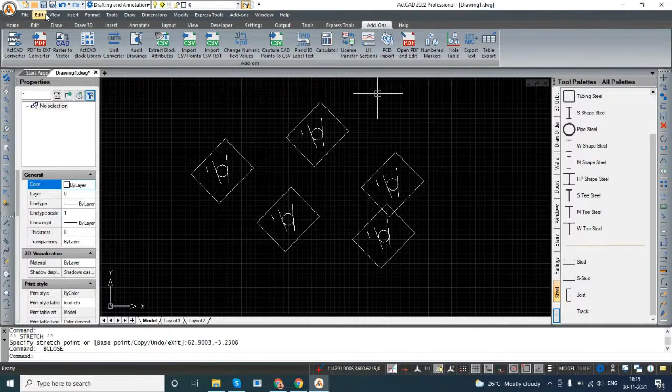Now what about XREFs? Blocks always reside in a particular drawing file. Now I am saving them on the desktop here. Okay, now I saved this. I am creating one more drawing. This is our new drawing. Either you create from a template, or from a wizard, or you open from something else. I have multiple options to do this.

Now again going to the insert menu, I have this XREF, these are external references. Now I want to attach my previous drawing, that is drawing one, as an attachment inside this drawing. The insertion point is 0,0. Now it's asking me what scale I want to insert - scale 1, X scale 1, and no rotation. Now that symbol has come and got inserted into this drawing.

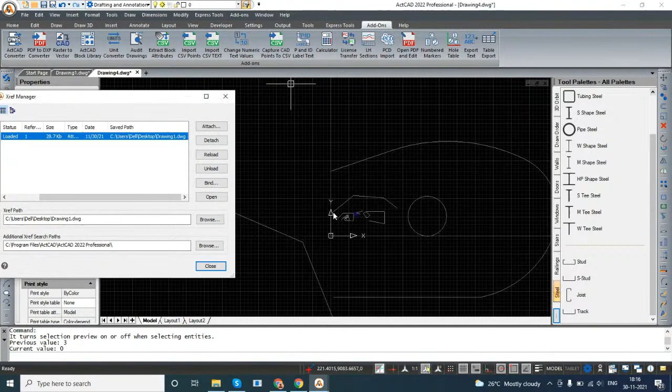Okay, if we are in doubt, we can go back to the XREF manager to see exactly where it got inserted. Now, this is the path. Maybe it became too small or too big for this drawing.

Okay, instead of this, I will take a fresh drawing and insert this as an XREF there so that I will be able to clearly see, instead of wasting our time attaching and selecting this drawing.

Oh, okay, everything has become XREF, including these blocks. Sorry for that confusion. I thought that I created the drawing only for this one, but everything, these are all part of that particular drawing.

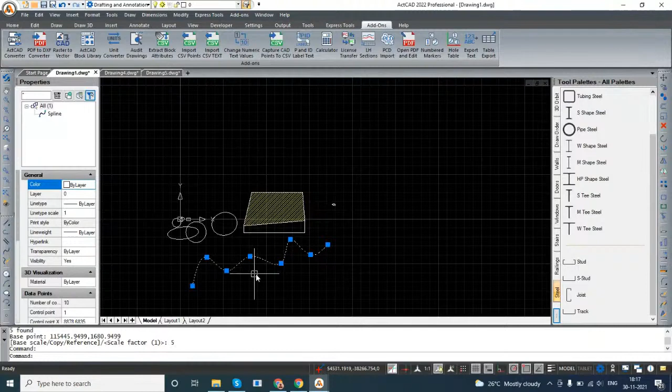Now, what is the advantage of this one? I am going back to this. I have selected it, and now I'm scaling up these things, from base point, scale factor 5 times. I have increased it, and also made some more changes, like changing the shape of this spline. Assume that this is my base design which I wanted to use as a reference.

If you come back to this one and reload it, now it is giving a warning, right? So it is also showing what changes are happening, and you can always select them, open them, and update them. So now when I made the changes, they are already reflecting in my other drawing.

So what is the advantage of this XREF? Let's assume you are having a mechanical drawing or a structural drawing. This is the base drawing which I want to use as a reference at 3-4 other levels, like casting level, forging level, or machining level. So I can take the same drawing as reference and use it at multiple places. But once those changes are completed, it always has reference to the original model.

So now whenever I'm making changes to this, all my upper level drawings like forging drawing, casting drawing, everything is seeing that geometry. Most importantly, this geometry is not saved inside this drawing file. We are only using it as a reference, so that even if it is a very big drawing, it doesn't add any size to this particular drawing.

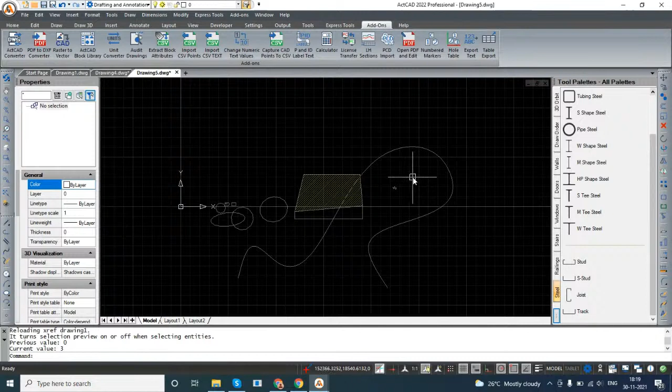And the same geometry I can refer in multiple drawings. For example, if I'm having an engine, the same engine I'm using in 3-4 vehicle models, so I can use it as XREFs in 5 different vehicles, and everywhere the geometry is reflected without any actual drafting. Now, if the original engine design gets changed or modified, the changes will be reflected at all other places. So that is the advantage of XREFs.

So I explained the uses of blocks, uses of XREFs, and finally the OLE objects. So if you want to insert any data from an external Excel sheet or something, a Microsoft Excel workbook, I can create new, okay, or create from a file.

Now I'm selecting desktop. We have a demo kit. I'm having some CSV data here. As a link, I can create it. Okay, now it is inserted. Now if you want to double click this one, it opens in the actual Excel application, and you can make a lot of changes to that Excel. Hit the save button, yes, and close.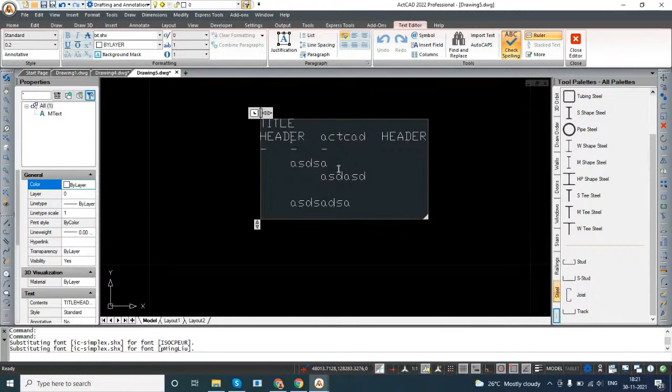Now I came here and did a paste special, and the script text I have pasted here. Now this is part of your drawing, and the content totally came into this one. But if you want to directly import it as an external thing, you can directly import from that also, and we can also paste special.

So I'm not finding any Excel sheet here. Maybe let me open this table data. So copying all these entities, going back to ActCAD, paste special. Okay, now it is showing me Microsoft Excel format itself. Now you see when I did that, directly that is embedded as Excel format. Now I'm closing this.

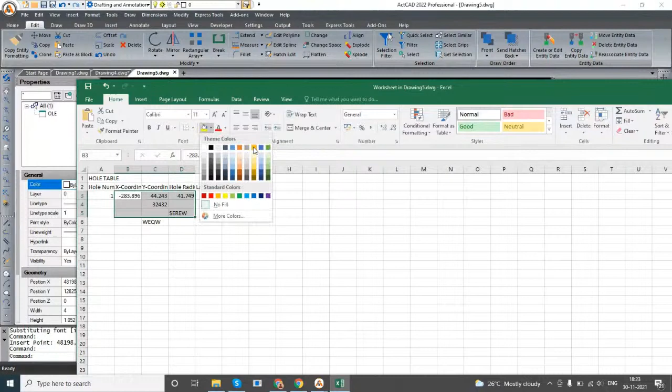Now you select on this border and double click. Now again this data got opened. Now I'm typing some more values and also changing some of the cell background color. Okay, and again hit this floppy button to save. Come here. Now the changes are reflected here.

So what is the difference between the original one and this one? This I kept it as a link, the original one. Okay, now this I directly pasted as a text. Now it doesn't have any link to that one. Now this is having, you see this is the OLE, object linking and embedding. Now it is part of your external and it is having the complete link to that one. The original one also is having a link, but the preview it has taken directly from that one.

So this object linking and embedding you can do with any of these office objects like MS Word, PowerPoint, Excel, and also PDF files. So these are the standard functionalities like any other software available here. And apart from that, we have a lot of add-on tools like this one, like PDF to DXF converter.

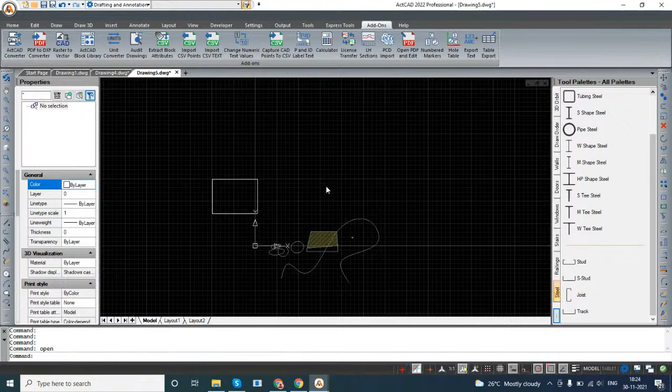So I'm using this one from the demo kit. I'm having some drawing which is in PDF format. I am directly opening that PDF as my drawing. So now you see it became our own drawing. So now I'm able to select these lines. I can delete them. Okay, now this is all hatching. Okay, and this is now a line. So everything got converted into lines. Now it became your drawing.

Also have the PDF conversions and a lot of additional options are available. And we also have some image converter. So here I'm having some, this is an image. We also have some inbuilt tool. Okay, though the quality of this image is very poor, but maybe I can go to internet.

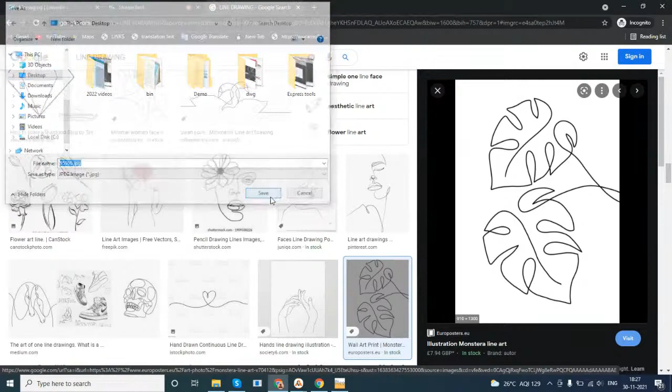Let me grab some line drawing. Sorry for that. Okay, so here we are having some images available. These are all the line drawings having some arcs, curves drawn, which I wanted to directly import. So for the time being, I'm selecting one of these images, save this image, because I'm trying to find some quality image for my converter. Okay, now I saved that image to the desktop. Now I will go back and open, because this also I can scan, but the quality will be very poor.

So now I have opened this, and here I have one-click vectorization option. That's it. Now everything got scanned. If you notice, these are the green lines which got digitally scanned onto this one. Now I have an option to save this vector in DXF format onto my desktop. Now whatever the conversion I did, that I saved onto my desktop.

Now go back to ActCAD and file, open. Now changing this format to DXF and hit on desktop. Now you see all these lines now part of your ActCAD. Now these are all the entities. It is a polyline. Now you can select, you can apply colors to them.

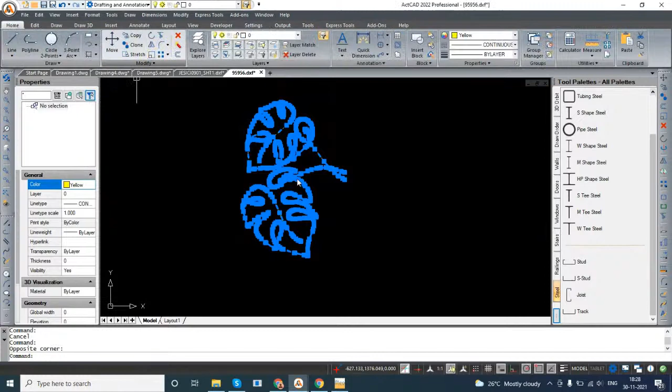Okay, maybe you can apply yellow color, or maybe some of them you can do, or you can also explode them. You can make the changes. Now they are all part of your drawing. Now if you want to make any change to this, or if you want to delete, you can do. So like this, we have this raster to vector converter also available in this software.

So like this, you are having lot of capabilities right from basic drafting to the advanced. Even I'm not covering the 3D modeling aspects. Okay, but you do have this one. Maybe if our time permits, maybe we'll conduct one more session in near future. Then I will do more options about 3D solid modeling and solids editing, facet.

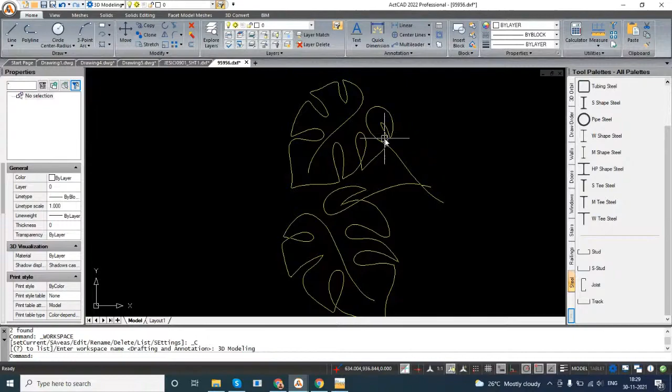But again, you remember, as it is a low range CAD software, it doesn't support parameters and expressions. It is very much similar to AutoCAD. You can create all these ACIS 3D solid modeling, unparametric models you can do. You can modify them, you can edit them, you can delete them. You can also perform all the Boolean operations. Okay.

All these options, you can apply materials to this 3D like that.

So if I'm changing this workspace to drafting and annotation, again, you can find all of them here under Modify. Here you have the solids editing option, so again all these options are available. 3D operations, now you are having these things, and finally you also have the primitive operations like Boolean operations available, like union, subtraction and all.

So now I want to stop my presentation here, and once again I want to quickly go through the contents.

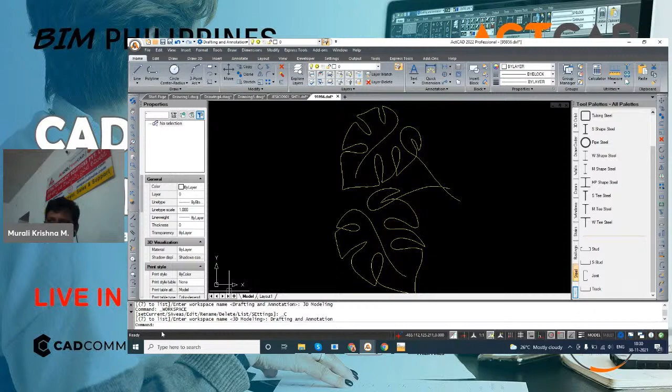If I have skipped any of the important aspects, I introduced you about what is CAD and the history and the development, the three categories of CAD software, the history of DWG file format, its versions, the background, the developments, the legal battles between the two entities which can read and write DWG, and the brief history about ActCAD and the legalities behind it.

And the interface, layout design, menus, the logical design of the menus and the tabs, the importance, how to easily navigate, or you can also find the quick command finder, or you can use the complete help, and the classic style interface, ribbon style interface, keyboard shortcuts, how to create the keyboard shortcuts either interactively or through CUI file. What about aliases?

Aliases also you can customize, you can create new, you can modify the keyboard shortcuts, you can create your own toolbars, you can remove the existing toolbars. All such options are possible. You can also use the CUI file and CUIX file with respect to the other software.

And what are all the file formats supported? I think I forgot to show you the other formats. Like in the import, we support many other formats apart from DWG and DXF, like ACIS solids, BIM like IFC, Revit files, DGN microstation DGL files also you can open them, DXF, IGS files, object files, PDF, step in, step STL import. Similarly, we have the export like ACIS files, BMP outputs, DGN output, DWF, DXF, IGS step, STL, WMF.

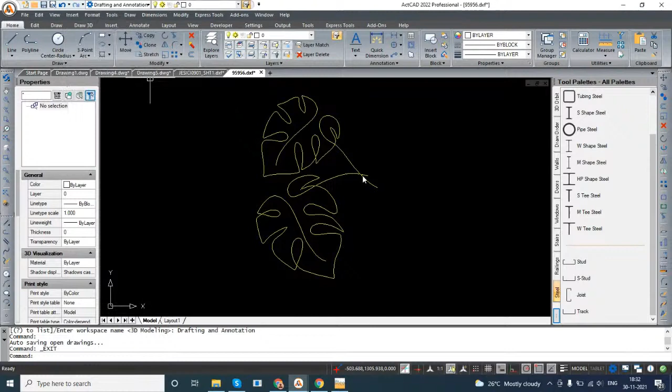And also I showed you about the 3D PDF, 2D PDF, converting the image formats and inserting nearly 700 types of images. Even AutoCAD doesn't support those many. If you go to the insert image manager, you have hundreds and hundreds of types of images which we support. So that way we are more strong.

Let's allow 2 minutes to see this.

And in the meantime, I have also explained about the concept of layers and their uses, how many layers we support, infinite number, model space, layout, what are viewports, what are their uses, a brief mention about the annotative scales, and zoom, pan, ortho operations, entity snaps, object tracking. And I briefly showed you the 3D, 2D entities like line, arc, circle, ellipse, rectangles, polygons, polylines. Okay, all those things we have covered.

And I also demonstrated to you about ActCAD Explorer, how it is useful to manipulate the entities and styles between drawings. That also I have explained. And the properties palette, whatever you are seeing here, this is called the properties palette. Left hand side, if you select any entity, all its properties you can access from here.

I also explained about some of the add-on tools like raster to vector converter, PDF to vector converter, and I have mentioned about the tool palettes, print and plot dialogues, and what is the use of block, what are the uses of XREFs, how to use OLE objects inside ActCAD.

Now let me try once again this image manager. Earlier it was taking too much time, which it shouldn't. Now if I'm trying to attach one image, now you expand this list, you have an infinite list, nearly 700 types are supported which are not supported by any other software.

So you have any kind of map data or GIS data or any TIFF or anything, you can directly select and insert them into the CAD software. And not only that, in the underlays, you can also insert the BIM underlay, like Revit files, IFC files, PDF underlay, DGN underlay, DWF underlay, point cloud, and we also support a lot of things. And we also have the geolocation feature.

We have uploaded a lot of videos on YouTube and also to our own channel about all these options. So I hope you all got a brief understanding about ActCAD, its capabilities and features. Thank you very much for your time.

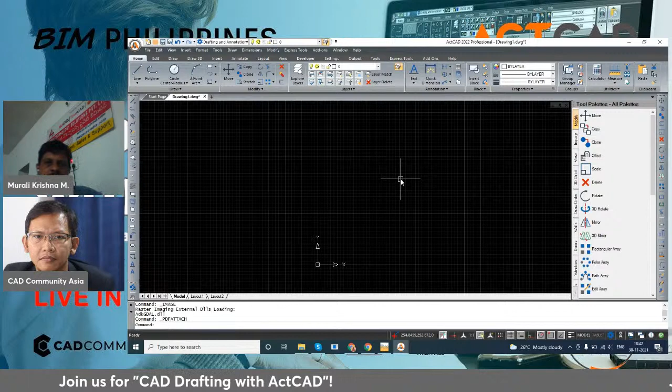You can use any rendering engine, but you need to take the output in 3D formats like STEP, IGS, DWG, or DXF. Complete your 3D design here and export the model, then open it in your rendering software like Artisan, Lightworks, or Lumion to do the rendering there. Basically, you create the 3D model here, then export it in the supported format. Mostly DWG, DXF, and STEP are supported in all software - these are universal formats in general. But please check with your software what format it takes, and if that export format is available with us, you can check with us.

If AutoCAD is somewhere around 4 gig, what's the file size for ActCAD when you download the installer? When you download the installer, it's about 900 MB for standard, about 1.2 GB for professional, and the install will be more or less the same size.

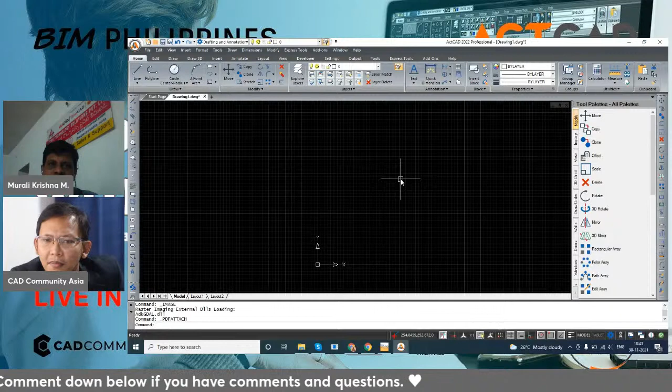Awesome, and I guess this is the last question - always asked - minimum system requirements to get things going.

Understood the question. We have mentioned at the bottom of every page of our website - it will work on Windows Vista and above: Windows Vista, 7, 8, 8.1, 10, 11, with 2 gigahertz and above operating system needed. Our latest version works only on 64-bit, but if you need 32-bit, you have to use our old version like ActCAD 2020. RAM 3 GB or above, disk space at least 5 GB, and graphics card is not compulsory. But if you have any graphics, either onboard or dedicated, keep the drivers up to date - either motherboard or graphics board drivers - to get the best performance out of this software.

So any normal PC, any normal laptop can be used to run ActCAD, even for high-end projects.

Any upcoming plans on taking this to the cloud? No, actually we support this software not only on Windows, but users can use it on other platforms like Mac also, through some third-party plugins - if it's Linux, like Wine plugin, and there are some tools available. But Windows operating system is required even on Mac to run ActCAD software. We don't have any plan to host it on the cloud, but we do have some options - we have hosted this on some cloud platform, but that is pay-per-hour basis. If some customers want to use this software only for a few hours, they can go to our website, contact us, Infinite Compute. We have one portal - they can go there, log in, and use this software on the cloud. But that is not a perpetual license, that is pay-per-hour basis they can use. In case of any urgent projects or short-term uses, that option also we offer.